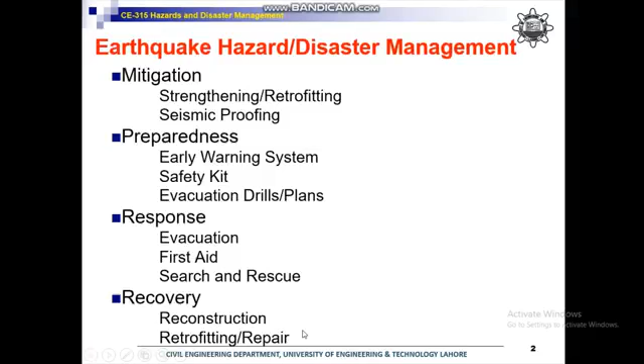Starting with this mitigation part, we have 2 main approaches as a civil engineer. One is strengthening or retrofitting, the second one is seismic proofing. I will discuss strengthening or retrofitting after covering seismic proofing, since I have a separate presentation file for it, so I will try to cover in detail how earthquake-damaged or earthquake-vulnerable structures can be improved for an expected or next expected earthquake.

Starting this slide with seismic proofing, there are several approaches which can be adopted to make a building seismic proof. Not exactly, or not 100%, seismic proof, but we try to minimize the impact of the ground motion expected from an earthquake. So in seismic proofing, we try to minimize the impact, or increase the capacity of a structure against an expected earthquake.

Some examples I have listed here, some very famous ones: base isolation or base dampers, tuned mass dampers. Another approach can be that we change or improve the structural systems, providing shear walls or braced frames. For the time being, keep these 3 or 4 terms in mind: base isolation, tuned mass dampers, and these structural systems, shear walls and braced frames.

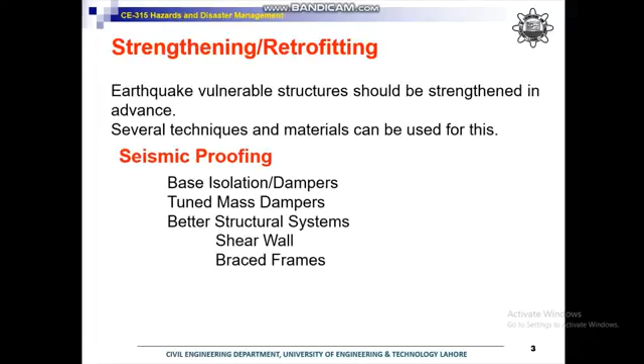So starting with, even before this base isolation or tuned mass dampers, the first thing is the research in this field, in the field of seismic proofing or constructing earthquake proof or earthquake resilient structures is... for the time being, please just watch this video.

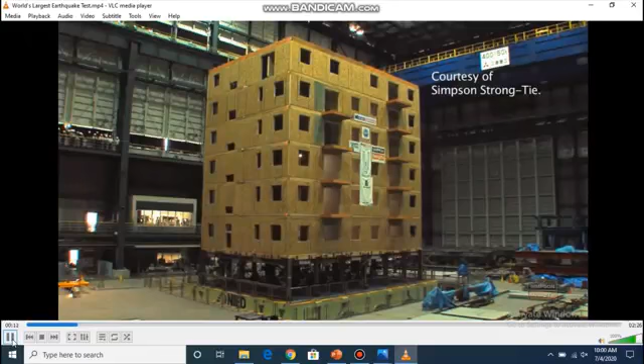Okay, so here what you are looking at is a full-scale multi-story building which is being subjected to an artificially induced ground motion. This is the largest shaking table in the world, which is in Japan, and it is called E-Defense. E is for Earthquake and Defense. This is the largest possible shaking table currently in the world.

I was fortunate enough to work on this shaking table, and I will be sharing some more pictures of this shaking table with you after we cover this video.

So what is going on here is that they are trying to test several new things. One is this material - the whole building is composed mainly of wood in this case - and then different types of connection devices, which Simpson Strong Tie, you can see here, that is the company which manufactures them. The idea of showing this video is that such research, experimental results, or on the basis of these experimental results, the analytical or software based results, that is very important to make sure that any new structural system, plan, or material that we try to use for future structures is proven to be safe.

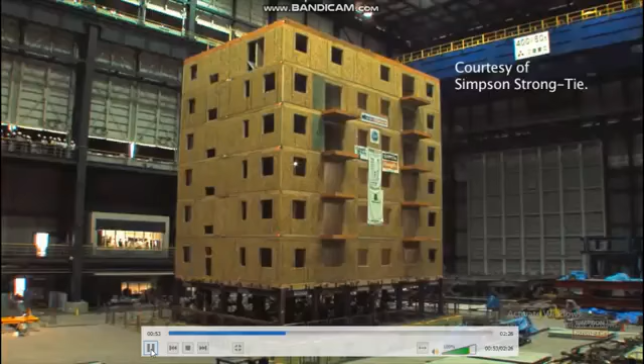If you look at this video, next will be the interior view of one of the rooms. Before that, these are the sponsors for this experiment. This is by far the largest shaking table experiment that has been conducted in the world.

We also have one shaking table in our earthquake lab in our department. If you have visited the earthquake lab of our department, you can find one significantly smaller than this one, but that is a very common scale that you will often find in most universities. They have that sized shaking table for research purposes, not for industrial application.

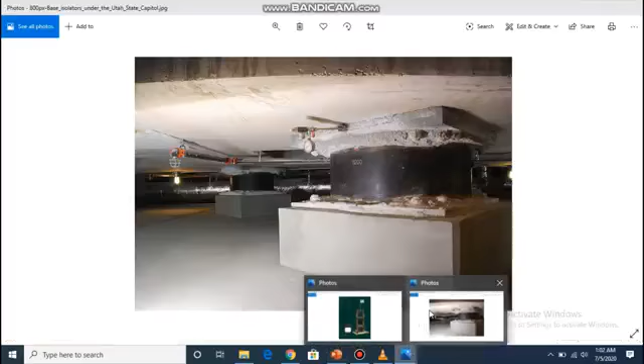For base isolation, one of the most common types of isolation device used is this sort of damper. This is one multi-story RCC structure; this is the start of the superstructure, and this is the substructure. In between, there is a separation provided - this is a damper, which is basically a rubber or rubberized material with several metallic sheets or plates sandwiched between the rubber.

You can find several dampers used for bridges in our test floor lab. They come there for testing, but this one is a dynamic damper, and its purpose is to dissipate the energy or reduce the ground motion that would be transferred from the ground to the superstructure. About 30 to 40 percent, depending on the design, of that ground motion can be dissipated at this level. This is a small gap left between the substructure and superstructure containing these dampers. Another benefit is that it contains supply or utility lines - sewerage system, water supply system - all accommodated within this gap.

Most of the pictures I'm showing you, including these, were taken by me, and these were present in Japan. The idea of telling this is that these are not theoretical objects - they have been in use for the last couple of decades. Most of the buildings I showed you in our earthquake hazard part in Japan, the ones performing really well, were actually seismically resisted, or their performance was improved by the incorporation of such devices.

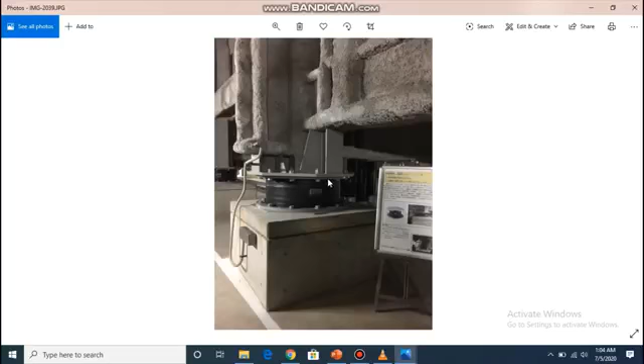This is the same kind of damper. You can get an idea that this is the substructure, and this is a column. These are beams for the superstructure, and a set of such dampers is placed so that whenever there is shaking, a significant portion will be dissipated here, and only a smaller portion will be shifted upwards. Then another kind of energy dissipation device, just beside this one in the same building, is this horizontal energy dissipator.

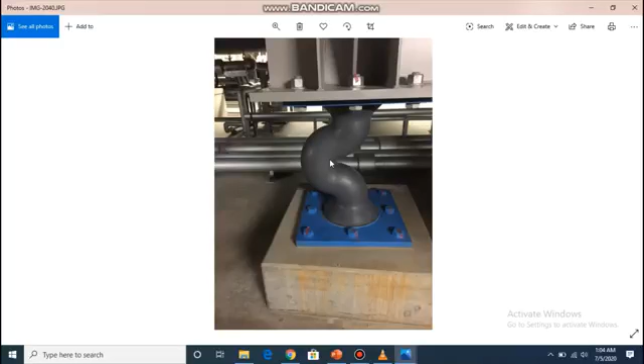The idea is this is again supporting one column or a part of the superstructure. Whenever there is excessive lateral deformation or significant ground motion, these devices will break from either here or here, and a significant portion of energy will be dissipated through their breakage or failure, so a lesser amount is transferred to the superstructure. We are defining predefined failure locations so the maximum failure takes place here, and any failure to the superstructure can be avoided. Later, when the earthquake is over, we can jack up the superstructure part and replace this device with a new one for any future expected earthquake.

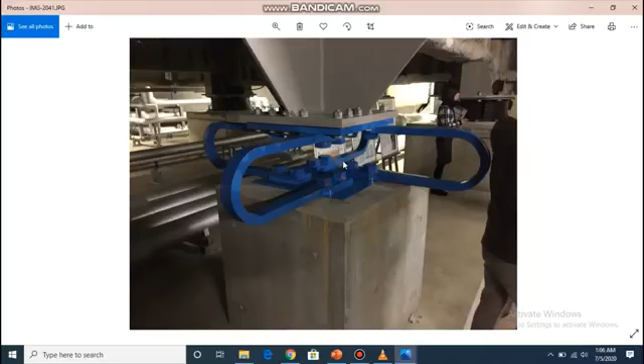This is another energy dissipation device in the same building. A part of the column is intentionally kept weak, with some margin of expansion provided. In case of a strong ground motion, if the force exceeds the capacity of this column, instead of failure of the whole column, only this specific part starts yielding, and maximum energy is dissipated here. This part can later be replaced with a new, similar component.

So these are different energy dissipation devices which are very much in use these days, and there can be several other types. These are only a few present in this building that we visited, but in most seismically well-designed structures, these components are very common.

Then coming back to this part, next is tuned mass dampers. The previous ones were base isolators, where we try to isolate the substructure from the superstructure. Whenever there is strong motion of the substructure, the superstructure will experience a significantly lesser portion of that because of the isolation provided. Then tuned mass dampers - I will start its explanation with the help of an example.

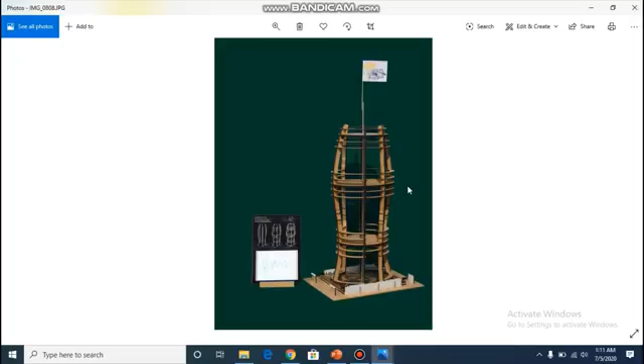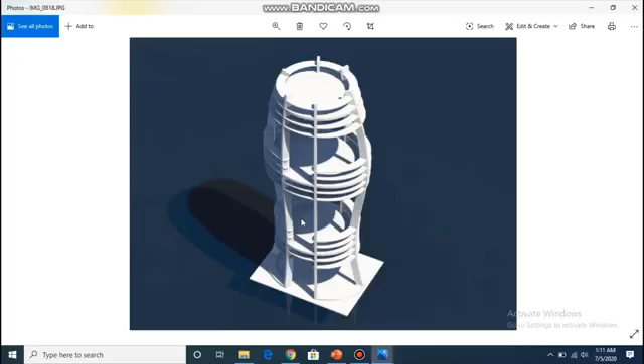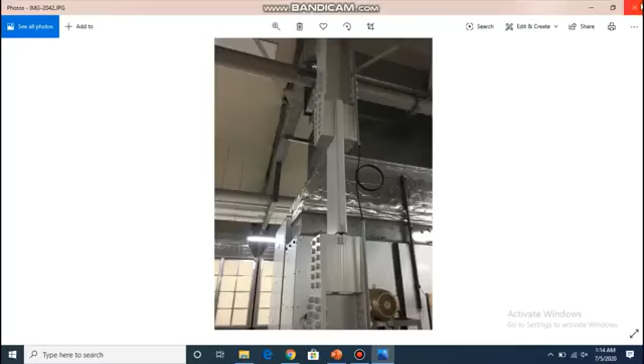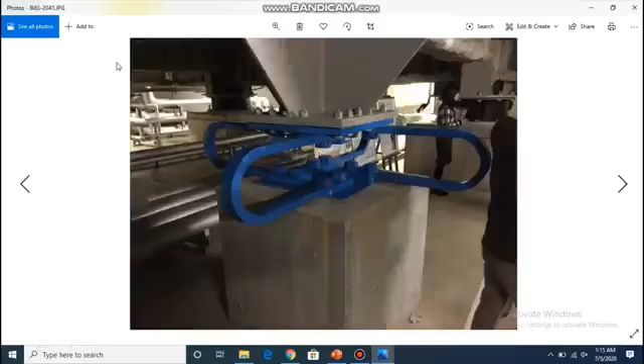So now let's discuss how they managed to construct such a tall building in such a seismically active area. Apart from other devices or techniques used, one major earthquake-proofing technique used in this building is a tuned mass damper.

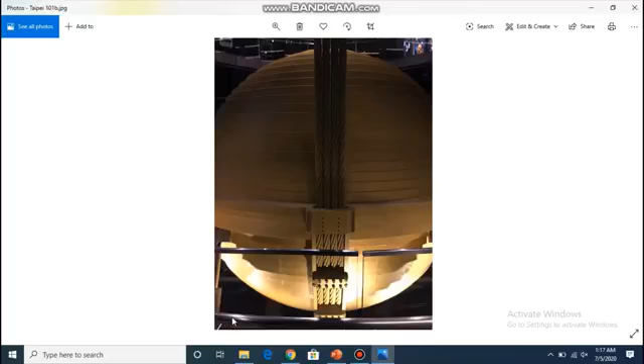The idea is simple: whenever there is excitation to this building by the earthquake, either in this direction or in this direction, this pendulum or heavy mass will move because of its inertia, in the opposite direction. So it will dampen out the applied ground motion at the top of the building, which will obviously shift from the bottom of the building, but it will significantly reduce the impact of the applied motion.

So the designers claim that almost all the wind loading, because of its height—there is significant wind loading that acts on this building—is countered by this one, and a significant portion of earthquake loading that may act on the structure is also resisted by, or balanced by, this tuned mass damper.

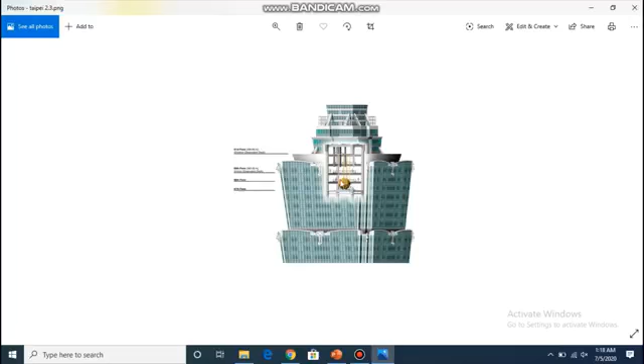These are the dissipators which are provided. The idea is that it should not start swaying vigorously; there should be certain control on its movement. So these are the actuators which can ultimately dampen out the movement of this ball.

I hope this would have given you an idea about the tuned mass damper. In simple words, it is the same concept as providing a water tank at the top of a building. So when an earthquake acts on that building from one side, the water will automatically slosh to the opposite side, overall balancing or, up to a certain extent, dissipating the applied energy.

But that is not a very controlled setup, because water will start moving without any control. Here, because of these controlled devices or actuators, its motion can be controlled. The idea is that overall the building should remain straight.

So there are several other types of these tuned mass dampers. This is one of them, simply suspending a weight from the top of the building. But there can be other types also which you can explore.

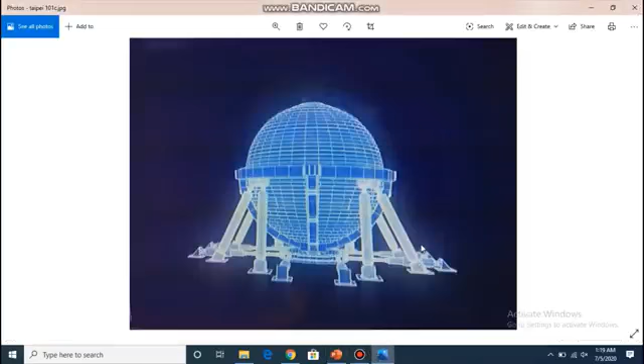Then the third technique used by civil engineers is that we can improve the structural system. We have three types of structural systems: moment frame, brace frame, and shear wall. A shear wall is a structural component, a very high reinforcement density steel or RCC wall.

This is not that much preferred in seismically active areas. In most seismically active areas, shear walls are provided depending upon the nature of the structure, the budget available, or space limitations. The second preference is a braced frame, and the third is a moment resisting frame, where the whole lateral action from an earthquake is resisted by the beams and columns without a shear wall or bracing.

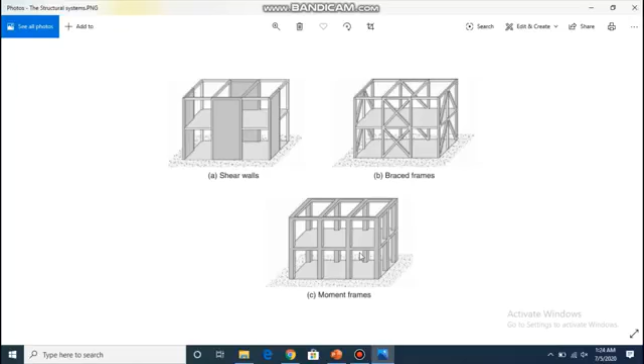Then let me just check if anything is left for this lecture.

So I will stop this lecture here, and in the next lecture we will discuss the strengthening and retrofitting techniques, plus the remaining three stages of the disaster management cycle.